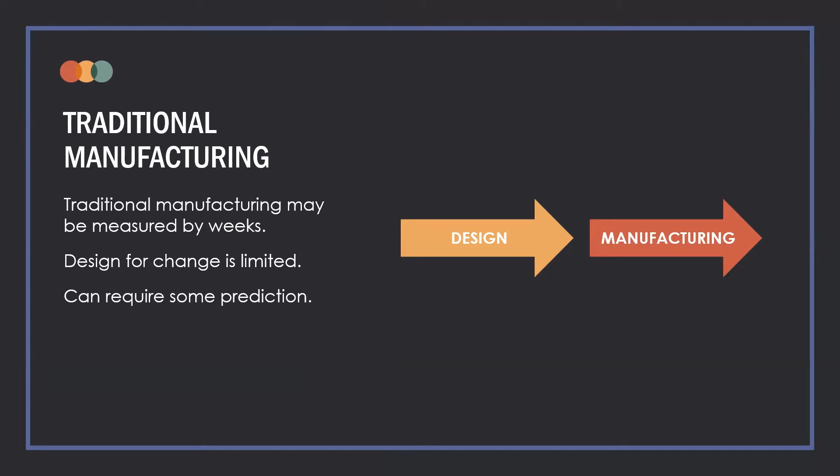A few key themes with additive manufacturing: the timeline is typically measured by the hour or the day. It's really easy to iterate fast, and qualification can happen during the process. A lot of times we'll just be prototyping, and eventually we'll get to a part that feels like it's the one, and that will actually go straight into production without really any delays.

One of the drawbacks is that it can be a bit more challenging to move up into the higher quantities. So usually if the quantities are in the 5-digit range, for our shop at least, that's where we tend to look back at traditional manufacturing, like injection molding.

But with additive manufacturing, it's super fast to just keep parts going as you're making updates in CAD. One of our engineers described it as being kind of similar to agile manufacturing. He said it's like he's designing with the expectation for something to change, and just doing continual rollouts versus one big update leading up into taking weeks or months of planning.

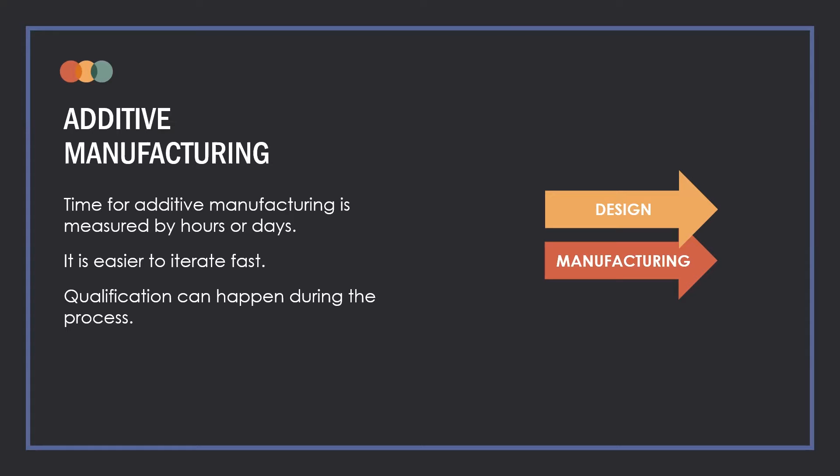So at Sherpa, one of my keys to success is early involvement. Whenever there's a new project that comes through the door, I try to start asking questions right away. I just ask about the quantities, is it a consumer product, R&D, what industry it might be in. The chances of success are always better when I get involved early on.

And that's for a couple of reasons. I think it lets me think about design for additive manufacturing a little bit better. And then it also helps me pick out the materials and define how we're going to work as a team, and just have the expectation to be prototyping constantly.

To add to that, at least internally, when we're working on parts that we're using for prototyping or that we're planning on making in larger quantities, early involvement is best because it means that we're going to be working collaboratively with our 3D printing department. That presents us an opportunity not only to relay what the specific project requirements are, but also introduce a little bit of that design thinking to create empathy and understand the user and the end use case. So we can proactively start solving problems or address issues, and from the get-go, design with additive manufacturing in mind.

Yeah, and when people like Sam started, they hadn't had a ton of experience with this specific printing process. So when we had early involvement with one of his first projects, he was actually able to learn about the process of printing and cleaning and curing post-processing as we went along. I think that contributed a lot to the way he was able to design parts better for printing. Whereas with later involvement, I feel like I kind of have to go back and reteach things.

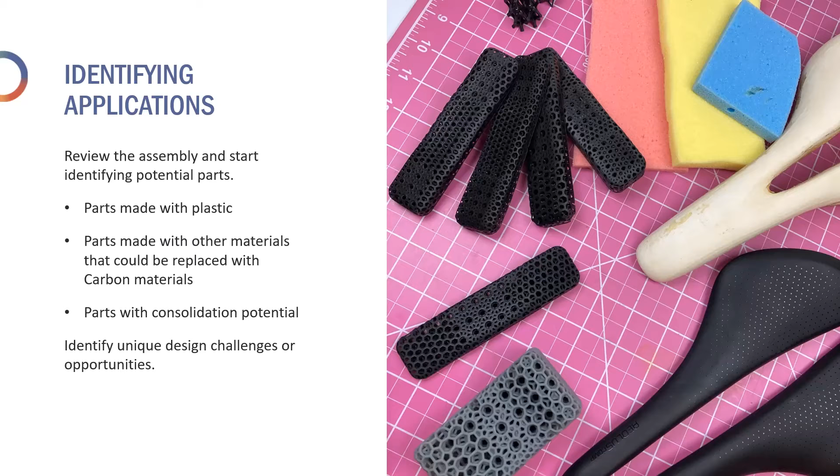Here's an example of that unique design challenge—it's actually an end effector. We were tasked with making an automated manufacturing machine, and it required a set of end effectors that would pick up a part, move it around this machine, and hold it during a couple operations.

The challenge was that the parts we were picking up had some variance in shape and density, and they also needed to be gripped at the same time without crushing the part.

So we actually just kind of sat down and shot out crazy ideas. I didn't really have a specific route I wanted to chase immediately—it was just about being abstract and not being afraid to try, especially with the printers in house. It was really easy to just start printing things.

So we threw out the idea of a toothbrush—can those bristles be used to hold parts more effectively? It's compliant, it's delicate, and you could shape the bristles to conform to the parts that you're holding.

Just because we found a suitable part didn't mean we were done developing, so we just tried to see where we could take this.

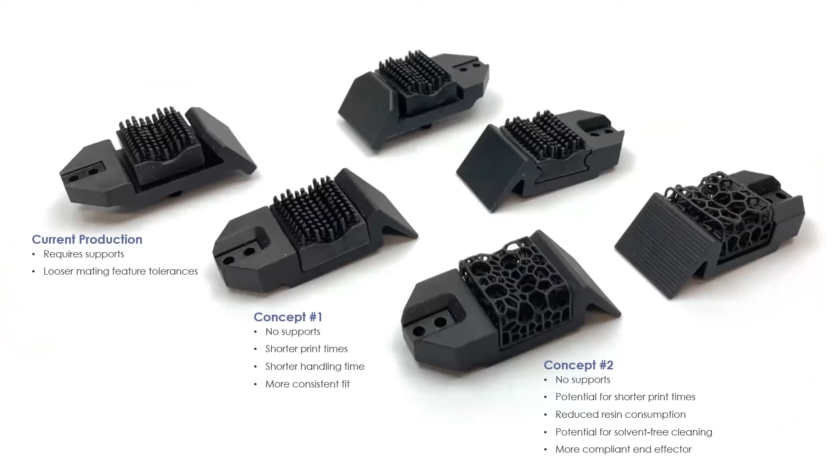This is kind of a recap of those parts on the right. The top set is the current production model. It did require a few supports, and as a result the tolerances were a bit looser, and the surface with the supports on it was a bit rippled.

So I decided that's going to be the first thing I tackle—how can I get rid of those supports? So more towards the center, I was able to make a support-free version.

Instead of using an annular snap fit, it just slid on. That made it a shorter print with fewer handling steps, a more consistent fit, and just an overall lower cost.

And then at the very bottom, I tried latticing this part. I assumed it would be more compliant, save resin, and save time, and ultimately that led to a potentially lower cost.

So hopefully when we do the next rollout of this product, we can implement one of the two designs at the bottom. And just to follow up on that—the quantities of these parts being produced, going with traditional manufacturing processes like casting or injection molding, would have been much more expensive, and we wouldn't have been able to iterate in quite the same way.

And with this, by the time we got to our second R&D concept, this is not manufacturable with any other manufacturing process, and most other printers can't produce lattices this fine in detail.

So the Carbon printers really enable us not only to pursue more creative solutions because they print really quickly, but they also print in much finer detail and much higher quality than most other printers do.

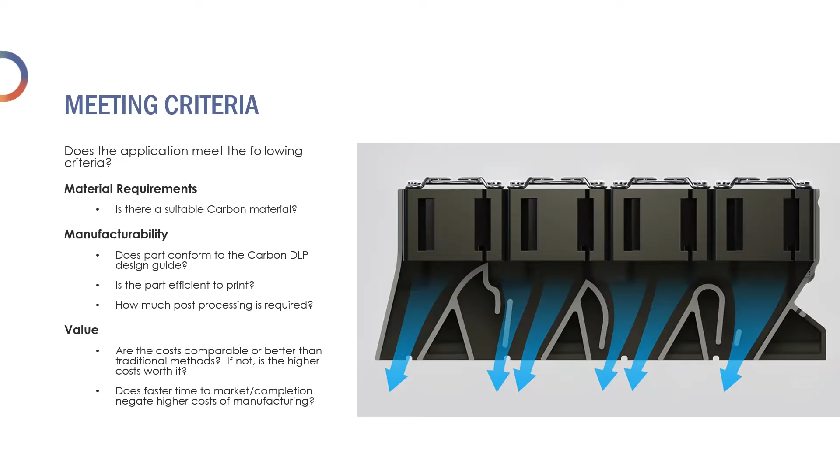So here's a good first example. I think this might have been our first production part. It's a replacement part for an aviation headset. This was by a small business that repaired pretty high-end aviation headsets. He was noticing this one part was constantly failing, and it was difficult to get replacement parts from the OEM.

So they actually reached out to us and sent us the original part. They didn't have any CAD, so we had to reverse engineer and basically rebuild this part so that it could be printed. So for their material requirements, it needed to withstand up to 55°C.

I believe that's the same temperature as a hot airplane or helicopter cockpit on a summer day. We actually didn't find this out until later in the process, but luckily we were able to respond quickly to the problem.

And then manufacturability. This was a great part to print and manufacture on our machines. We could print a lot at a time. It was almost entirely self-supporting. The supports weren't on any mating surfaces, so we didn't have to remove them. They weren't on cosmetic surfaces either. It was compatible with our smart part washer, and it did not require salt baking.

So for those familiar with the Carbon printing process, a lot of the rigid resins benefit from baking in a big tub of salt. It just minimizes warp, but it's also a little bit of extra time. So we were able to get rid of that step.

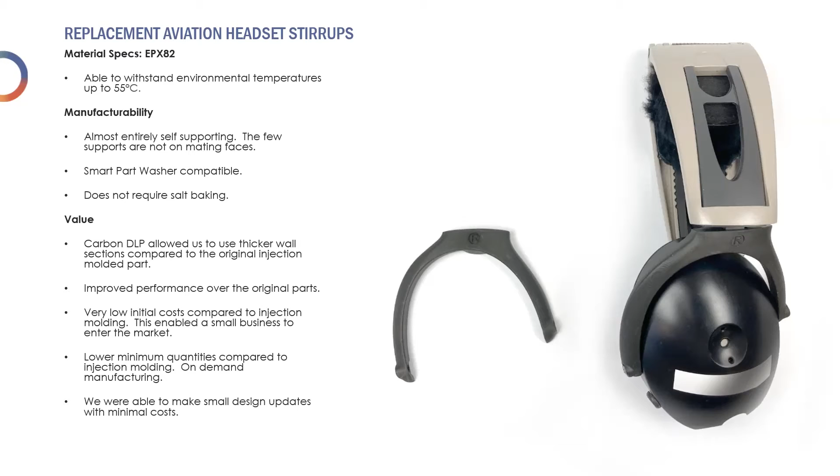And then we were able to make design changes as we went along. The first version wasn't perfect, so we just kind of continually made improvements as things came up.

So here's a quick lineup of just that progression and those iterations. Then I'll go into a little bit more detail.

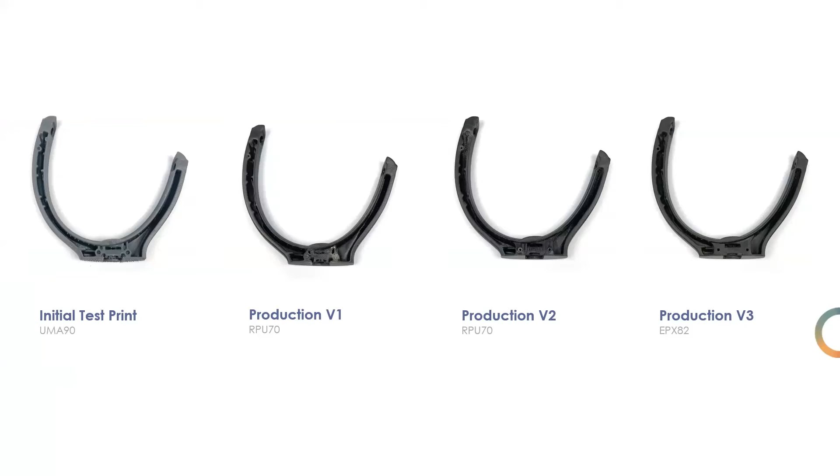This was the first print. It was just raw scan data. We hadn't done anything, it was mostly just a sanity check to make sure this thing was scanning in at the right scale, roughly the right shape and size. The holes weren't really the right size or depth, and surfaces that were supposed to be flat weren't exactly flat. So it made printing a bit more challenging and time consuming.

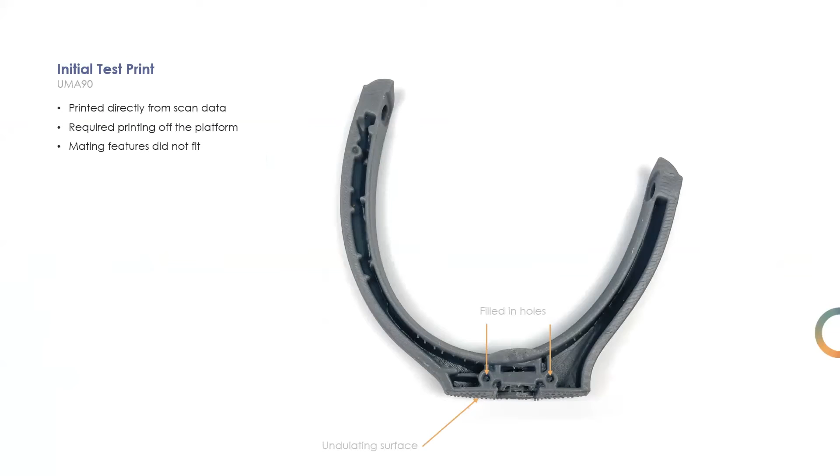So for the first production version, we flattened out what was supposed to be flat. We corrected all the holes to be the correct diameter and depth. But what we did notice was that it was difficult to clean. It was really inconsistent. At this point, we might not have even had our smart part washer. So our yield rates weren't really perfect. You could see in the photo that there's some kind of goopiness - that's actually an example of kind of the worst of resin not being perfectly cleaned out.

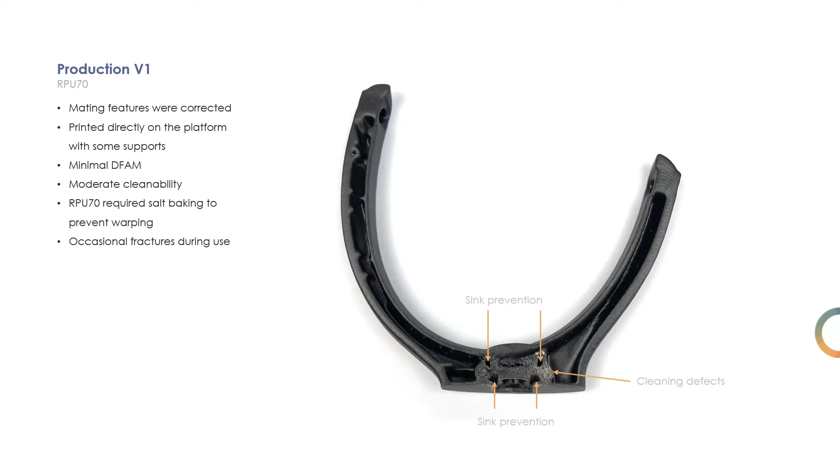And then we still experienced a few fractures. He would call us up saying one person broke a part here or here and send a couple of pictures. And we realized that all of those fractures were right where the injection molding features were. So there were a few voids, and we are pretty sure it was for sink prevention. So on this part, we got rid of those injection molding features. We just solidified the area. It made printing smoother, less supports, and easier, more consistent cleaning.

So what we saw was improved yield rates, less cases of fracturing, but it still required baking and salt. It was about an extra 20 to 40 minutes per day, but we didn't think it was a huge deal. And then occasional cleaning defects - at the top left, you can see a tiny bit of that goopiness or fuzziness.

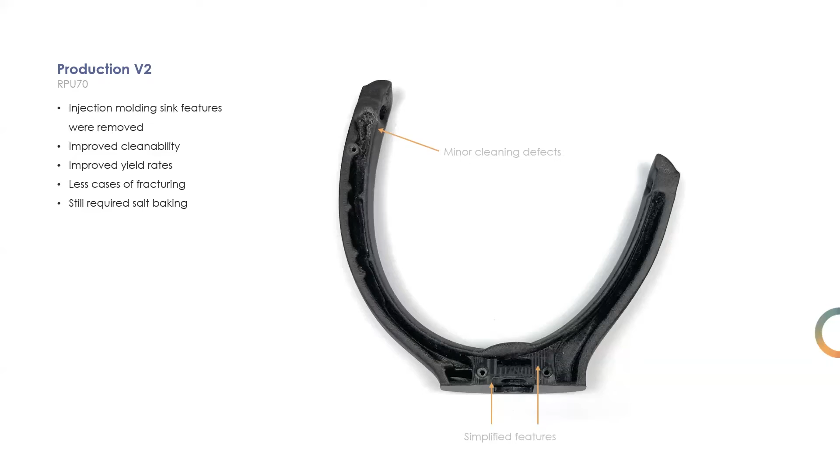So this current version that we're actually printing right now, we had to change it to a new resin - the EPX82 resin. The customer called me up saying that a lot of these were warping over time, and we realized it's because summer was rolling around. So we switched to EPX82 for the higher heat deflection temperature. We also realized a couple other benefits as we switched over. It cleaned much better in our parts washer, really consistently. And then the yield rates were pretty much 100%. I don't even think we broke any during the printing or cleaning process.

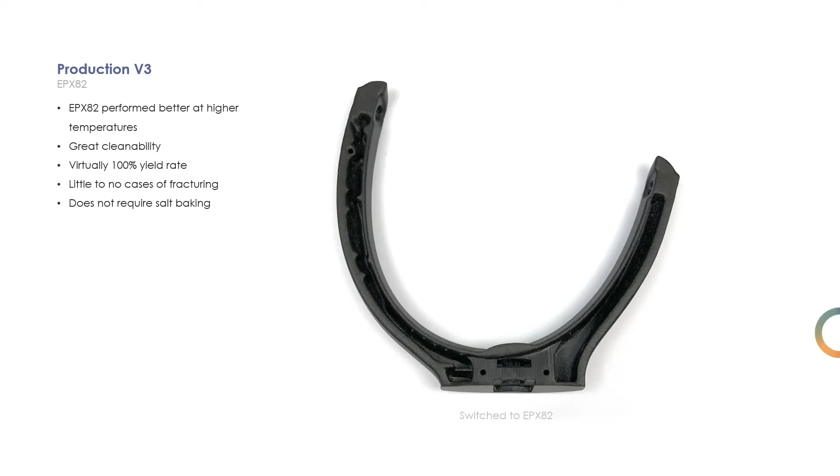And then also he noticed less cases of fracturing from his customers. And then another thing we noticed is that the parts were possible to bake without that salt - we were able to just put them on a baking rack and get accurate parts. So this was a great story of iterating as we went along and tackling problems as they came up.

And then here's another example of another good fit. I think it was kind of on a different end from that last part. It's a bit more complicated, a bit larger, definitely a higher cost, but the value factor was higher.

So for materials, the first requirement was surviving temperatures up to 80°C. This is a power supply fan duct, so it's in a small metal box with a lot of heat generation. It also needed to pass some military standard testing. There's a chance of these being used in pretty harsh environments, so it actually went through a lot of shock, vibration, and environment testing, and performed great and passed everything.

And manufacturability, same thing as the last one - almost entirely self-supporting, and the supports that were there were on non-mating, non-cosmetic faces. It was also part washer compatible. One thing with this is the print times per part were actually much longer - we could only do 2 at a time, and it takes roughly 3 hours. So that was a bit of a setback, but we realized that the value outweighed that by far.

So we evaluated this for machining and molding at one point, and it was just too complicated. We would have had to break it up into multiple parts, sacrifice a lot of performance, and it would have slowed down our entire design process too.

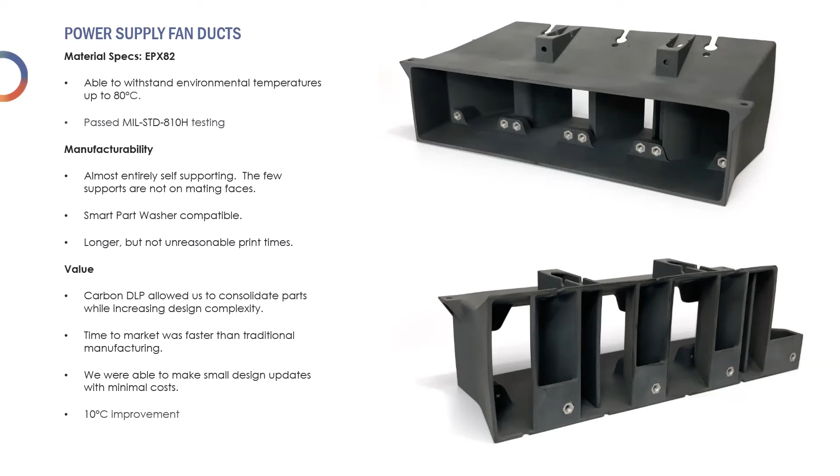Now we're getting into some of the thought processes or ideas that keep us creative and constantly exploring at Sherpa. We're always looking for new tools that we could integrate with other processes.

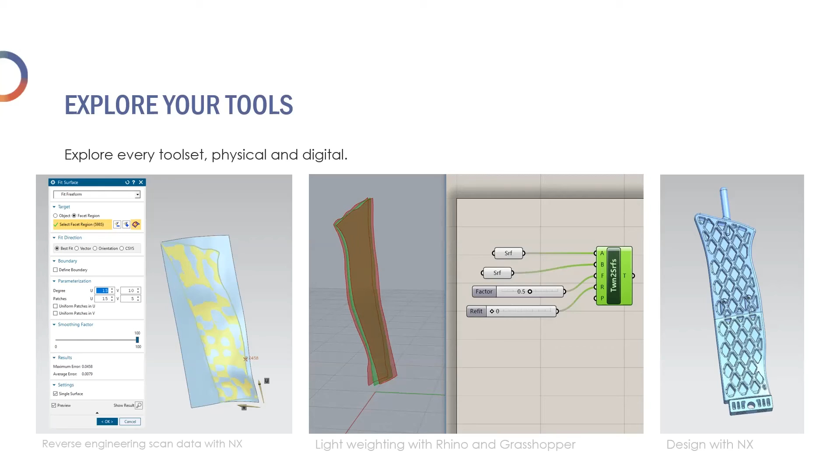Here's an example of a part that I 3D scanned. I used NX to reverse engineer it, and then I actually used Rhino and Grasshopper to do some lightweighting. Then we took that and brought it back into NX to finish off a few last design details.

And when we don't get presented with a problem at Sherpa that forces us to explore other tool sets, we actually just make up our own.

Here's an example from one of my projects. I do a lot of biking, if you haven't noticed on Sherpa's website, but it's my greatest excuse to get creative around here. Every time we get a new tool or I have a little bit of downtime, I'm just looking for ways to print my own bike parts.

So here I'm taking a 3D scan of the lower section of my bike, and instead of doing a bunch of hand measurements to make sure the parts fit, I just built the part in CAD right over the scan data.

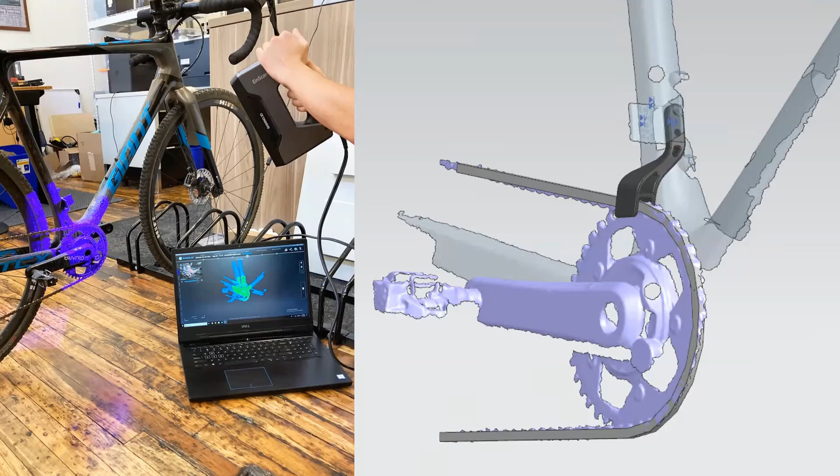At Sherpa, whenever we have new materials come in for the carbon printers, or we have new tools at our disposal, we always try to find new ways of using them. We got a fireproof or flame retardant material a couple months ago, so we were able to print some parts and set them on fire, which was obviously a pretty fun exercise, but it also let us know what the design limitations of the material were.

It's kind of an expectation on my team, at least, that when a new tool comes in, we better be looking at it and thinking of ways to bring it into our process. Everybody should be making something at all times. I think that's probably the great benefit about working at Sherpa.

This is our last section. It's about ideation and creativity. I think this is one of the key factors to us staying on top of the game and constantly coming up with great ways to use the printers.

To us, ideation is basically just coming up with a bunch of new ideas, being unfiltered and trying new things. Typically our medium is just drawing or written notes. Document as much as possible. The goal is just to go beyond what's already out there, exceed the precedent, explore a lot of options.

Yeah, I try to think of... oh, go ahead. No worries.

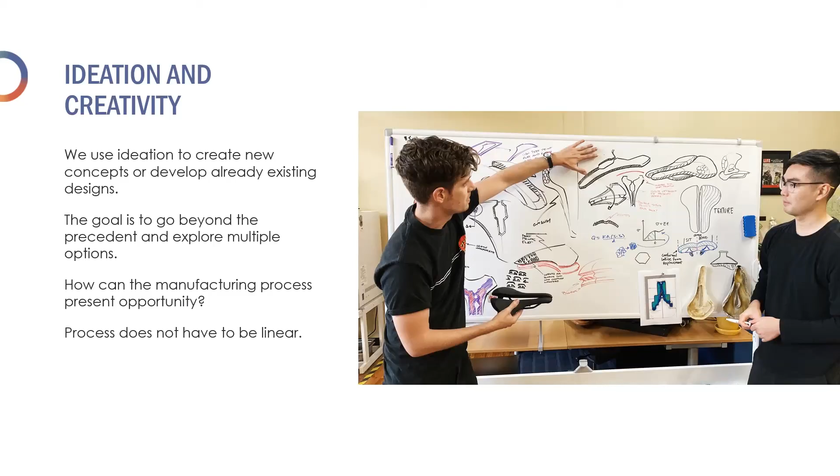We try a lot of things, and some of them end up with completely unexpected results, and some of them are just downright funny. But every now and then, what starts off as kind of a ridiculous idea, or an idea we're not sure will work, actually ends up being a pretty golden concept, and we can end up moving that into the final design.

One of the big things the Carbon printers really enable us as a tool to do is things I don't think we'd be able to do with most printing processes. A lot of other printers I've used in the past have pretty strict design criteria, and the quality is questionable, requiring a lot of post-processing. With the Carbons, we have a much different scenario where we can create a prototype, and with just a little bit of refinement, we can really make it shine as looking like a production part.